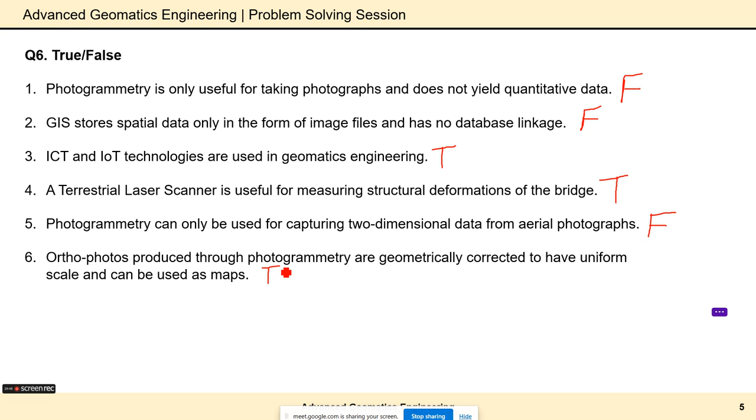Got it? Okay, so we'll move to the next question. Identify the true statement. Here a statement and the reason behind it are given, and you have to say which option is right.

The first statement is: remote sensing can help monitor deforestation and urban sprawl. Is it true or false? True. So what do we do in remote sensing? Basically, yes.

Okay, so first we'll break down this sentence. Remote sensing - what is remote sensing? You have different satellites in the sky. They are monitoring Earth, so they are also known as Earth observation satellites.

Now these satellites monitor the area of Earth like this. If any forest is here, let's say we have a tree representing forest. This satellite will move in this direction and measure this area, and after some days it will visit the same place again. Now, if there is deforestation, we will be able to see a decrease in the number of trees, or if there is urban sprawl, it means there is an increase in the number of buildings. So we will be able to monitor.

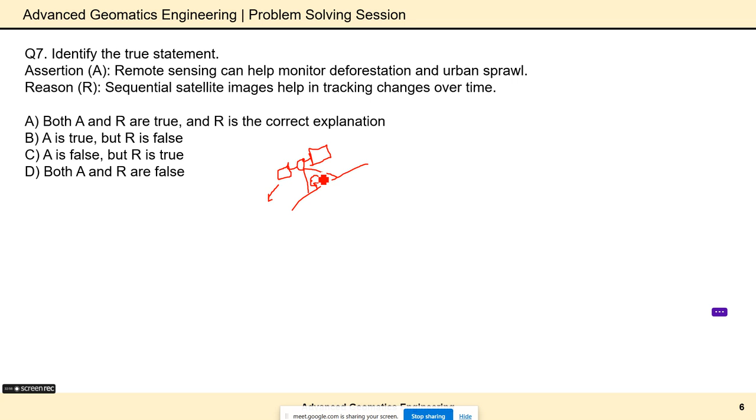Both true. Okay, and then R is also the correct explanation because with sequential satellite images, we get an image every 6 days or one day depending on which satellite we are using. If you go to the subsequent part of this course, you will learn more about which kinds of satellites are available and how frequently they give data. We will also do some practical examples so you get more idea of it. So the right answer is option A, the seventh one.

Now the next question: arrange the following types of photogrammetry in descending order based on technological advancement, most recent to first. So how we used to take photos in the past, how we collect photos in today's era, and what is the evolution throughout this period.

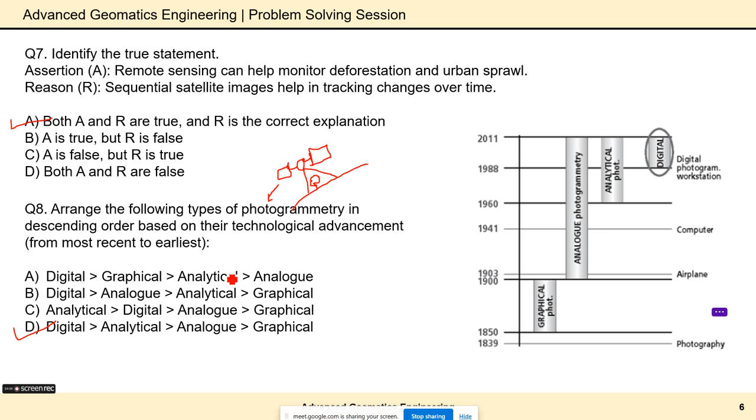If you have gone through the lectures, you might have seen this in the second week or second module, where it started with how in 1839 we took the first photo, and it all started with photogrammetry, then there was advancement in the camera. First we took graphical photos, then we used films to get photos, then it became more advanced with analytical photogrammetry, and subsequently in today's era we are getting digital photos after 1988.

So the next question is: which of the following companies is not a geospatial software provider in India? Yes, D. So can anyone tell me what they provide if not software?

Have you heard the name Sokkia? What do they do, this company? Basically, this company produces different kinds of survey instruments. So they provide the instrument or hardware part rather than software or service.

So the next one is: find the correct statement, where you need to know more about photogrammetry and remote sensing. Before that, can anyone tell me the basic difference? What do you mean by photogrammetry and what do you mean by remote sensing, and how are both different or are they the same? What is your take on that? Yes, true, that's true.

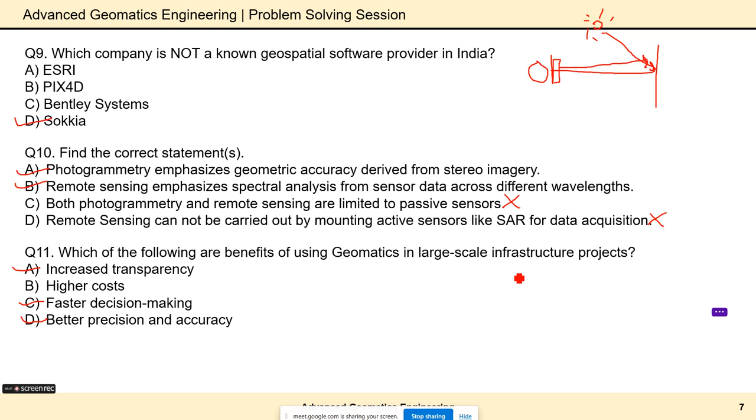Any doubt? Okay, so now the next question is: in comparing maps and aerial photographs, the clarity of details is - so in which will you get more clarity, in map or in photo? What might be the true option out of these four?

Anyone else? More on photo than map. Anything else? Any other option, guys?

So can you see the options here? It's like, if you think about it - just see the options. Do you see any similarity between option D and option A? Do you see anything there like option A and D? Don't you think both are the same?

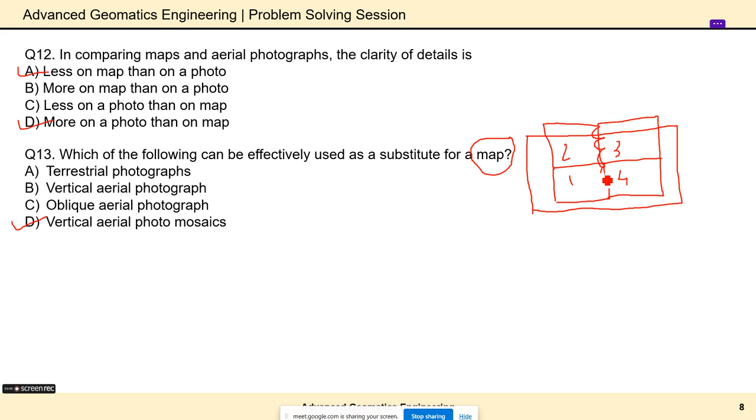These are different photos captured in the same area - photo number one, two, three, four - and then you will stitch all the photographs with each other. That is known as a photo mosaic, and it will give a larger view.

Did you get my point now? So the correct answer is vertical aerial photo, but with mosaic, as the map will show more area but lesser details. So there will be lesser detail in the map, but the area will be large.

The next one is scale. So what is the definition of scale?

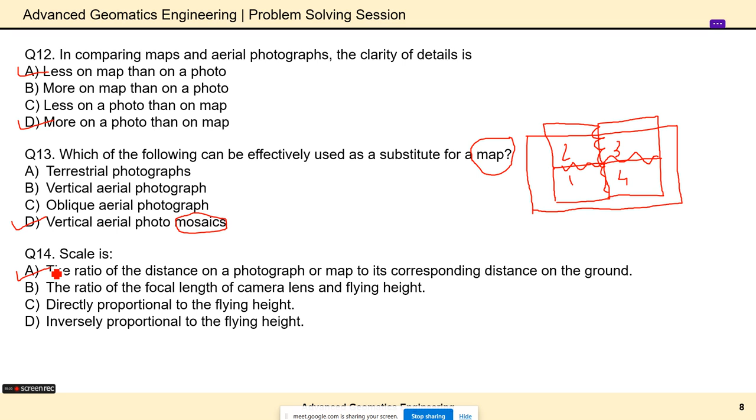A. Yes. Anyone else? So the scale is the ratio of distance on a photograph or a map to its corresponding distance on ground, that is known as scale.

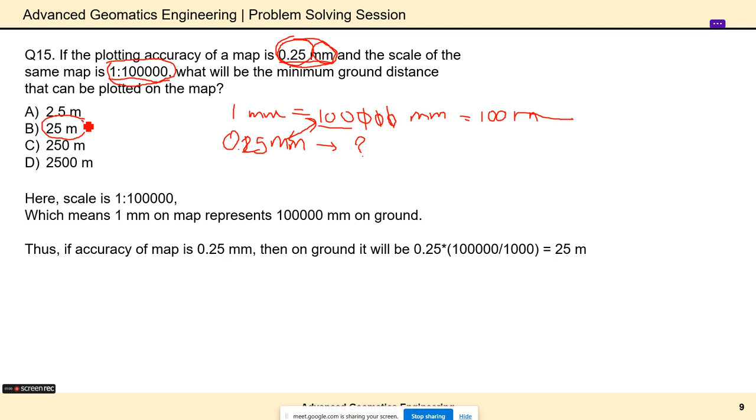So the next question is: a line measures 15 centimeters on an aerial photograph. So we have one photograph in which there is one line which is 15 centimeters. It measures 5 centimeters on a map.

So 15 centimeters on photograph, and it measures 5 centimeters on map. So on the map it is 5 centimeters, the same line will be 5 centimeters, at a scale of 1 to 24,000. So the scale for the map is 1 : 24,000.

Okay, now let's decode the question further. The photograph was taken using a camera lens. Now they are talking about photograph. What photograph? The photograph was taken using a camera lens of 20 centimeter focal length. So for this photograph, f, which is the focal length, is equal to 20 centimeters.

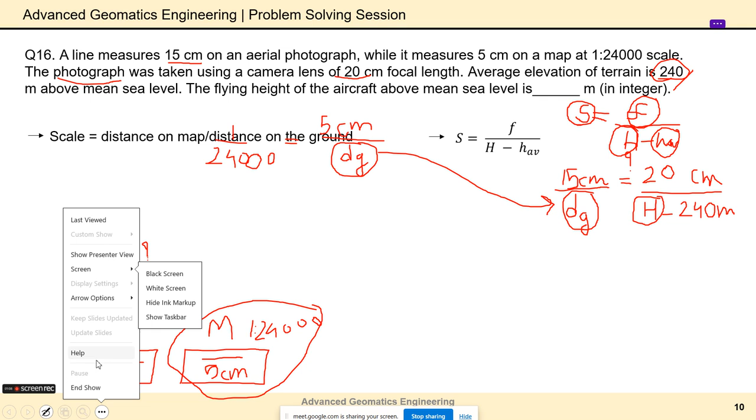So we will now see the solution. We will get the first value of the scale, and then we'll plug that in. So our actual answer will be 1840. If you made any mistake, it might be in the conversion of different units. So basically you will get the answer 1840 meter.

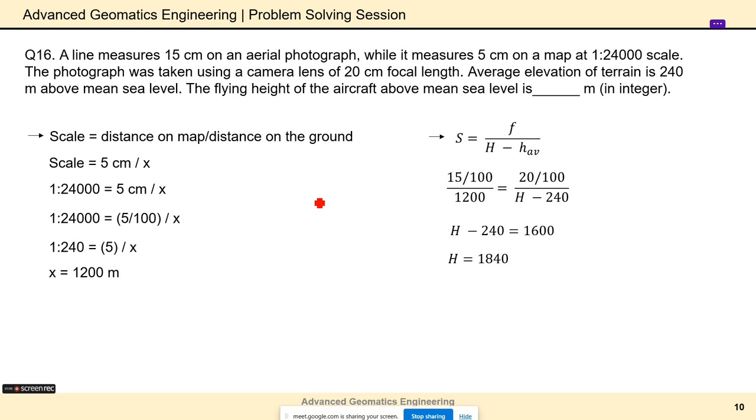Any doubt in this question? Basically in the concept of this question, any doubt? Okay, then we'll go to the next question.

So what are the Manhattan and Pythagoras distance with respect to point A and B in the figure given below, where the Euclidean distance between A and C is 4. So what you have to mean is each box represents 1. So this length is 1.

If you don't know the concept between Manhattan and Pythagoras distance, I will give you the brief. What does that mean? If given two different points A and B, then if you go from A to B, what will happen? If you go diagonally, then it will be considered as Pythagoras distance, as you do using Pythagoras theorem.

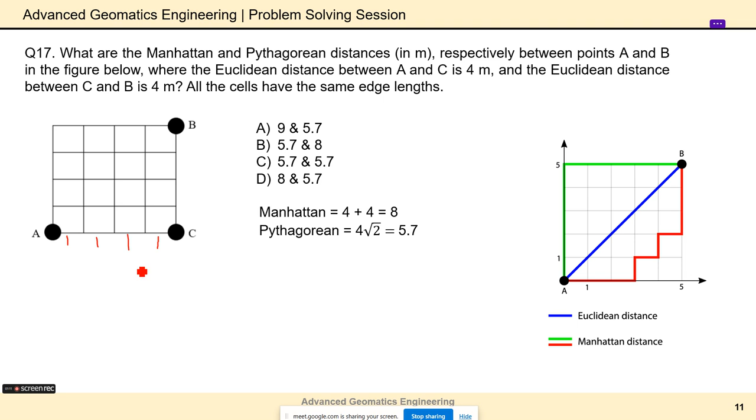Okay, so the correct option will be D. Manhattan distance means you have to go line by line, you can go here like this, to like this. Then it will be 4 plus 4, 8.

Or else what you can do is you can go 2, 3, 4, 5, 6, 7, 8. So you can go in any way, but you don't have to go diagonally. 1, 2, 3, 4, 5, 6, 7, and 8. So it will end with 8 only.

Whereas the Pythagoras distance will be the minimum distance between A and B, which will be like this. So if this is 4, this is 4, then that will become 4 root 2.

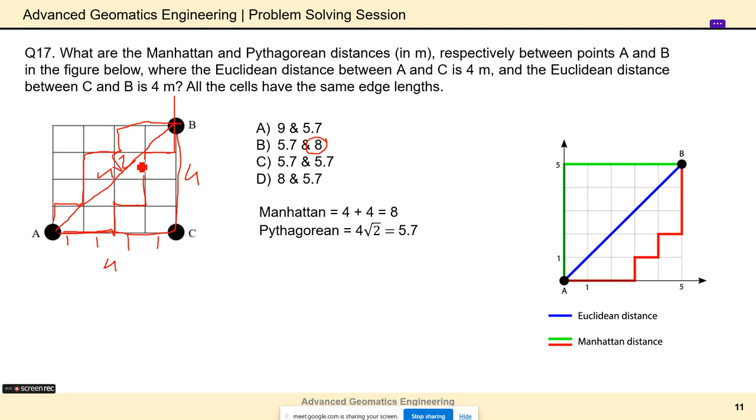So the next question is, which of the following map scale is more suitable for urban planning? Here you have to stress more upon the definition of scale: distance on map or image to distance on ground.

So first of, yes, anyone else? So the one answer which we got is 1 to the 10,000. Anything else?

So what I want to say here is, if you have urban planning, then you need very high resolution. It means the distance on map should represent very high resolution distance. So in which of the following, if it is the same distance on map, it will represent very high information.

The answer is A, 1 to the 10,000, because it's just a higher resolution scale. Why? Because if we consider both in mm, then 1 mm is representing 10,000 mm, which means 10 meter. So 10 meter on ground is represented by 1 mm. Here 25 meter on ground is represented by 1 mm, 50 meter on ground is represented by 1, and here 100 meter on ground is represented by 1. So maximum detail we will get in the first case.

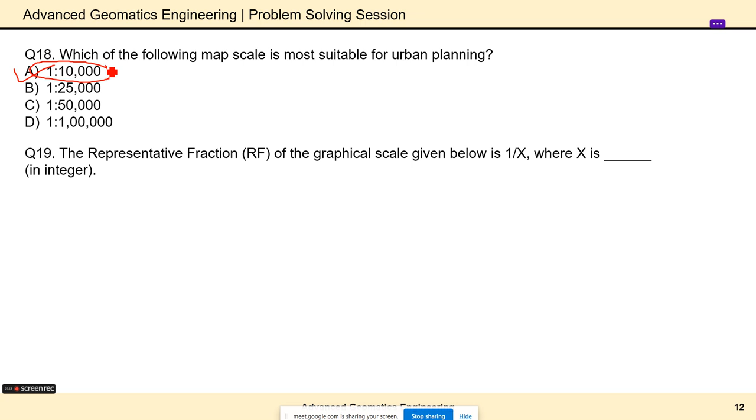The next question is the representative fraction RF of the graphical scale given below, which is 1 by x. So what will be the value of x?

100. Okay. Anyone else? 0. Anything else? So we got two answers till now, 100 and 0. One is 100 and one is 0. So you have to see the entire scale. Any other answer? Anyone?

So let's decode this question. 10,000. Okay, the third answer is 10,000.

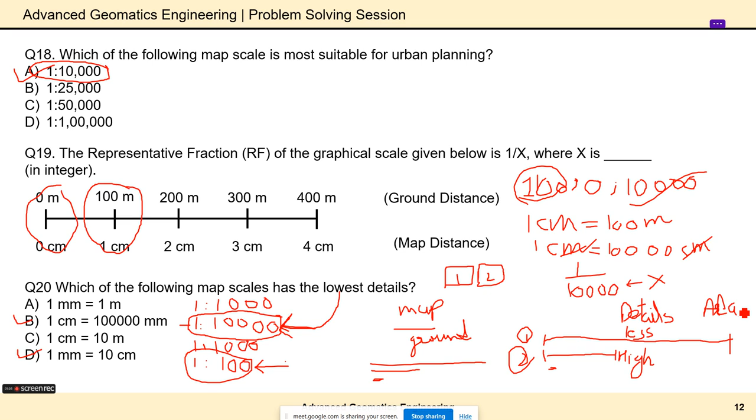Okay, so the next question is, what is the typical positional accuracy range of LiDAR? This is just a memorization question. Does anyone remember what is the typical accuracy of LiDAR? You can refer to your notes also.

Okay, and in the horizontal direction, how much? Any option is right. In horizontal also. I don't agree with you, because if the accuracy is good in both vertical and horizontal, we should be able to precisely map.

30 to 60 horizontally. Why? You can take anything, whether it's LiDAR or GPS, they are very poor in the vertical dimension. They are not able to capture the vertical dimension clearly. Height information you will not get very clear, but the horizontal information you will get very clear. If you use Google Maps, you will exactly know how you are going from one location to another if you move north or left, it will pinpoint your location properly. But if you are going up, let's say one floor to another, it will show the same location, because GPS is very poor at getting vertical data. That's why in any surveying operation, vertical accuracy is much less compared to horizontal accuracy. But in LiDAR we still get very high accuracy in the vertical dimension as well, though it's still less compared to horizontal accuracy.

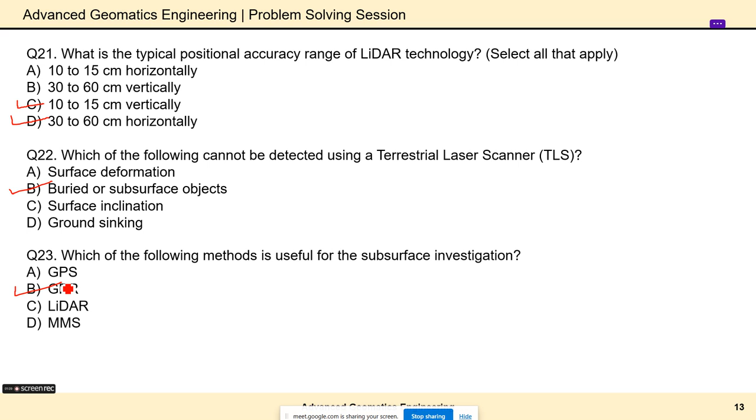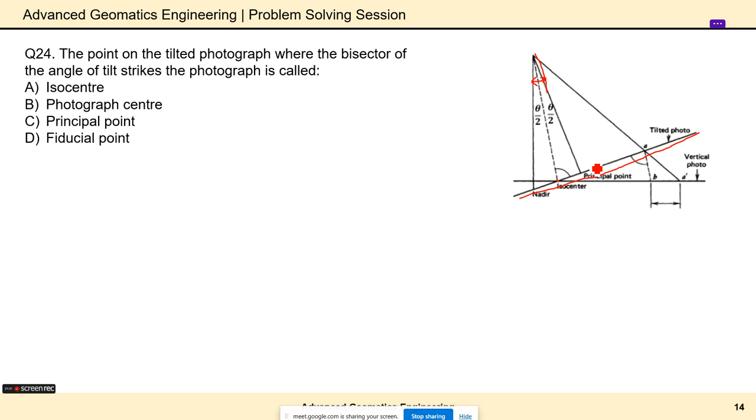Then the next one is, increasing the angle of tilt in aerial photography may lead to. Now if this angle is there, we will increase this angle, because this nadir line is fixed at 90 degrees. But now I am changing this line to increase this theta, moving this line like this. So what will happen to the photo?

Okay, so my image will become like this.

So why are the other options wrong? I am more interested in knowing that. If you're saying option A is right, it means you're also right, I mean that it will obviously capture more area. But I want to know why the other options are wrong.

Exactly. Yes, exactly. True, true. So your logic is true for all the options.

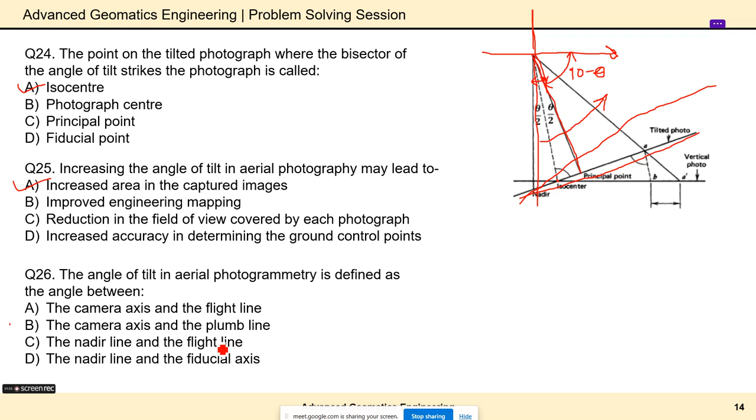But plumb line and nadir line both are 90-degree lines. So here they have used two different words: one is plumb and one is nadir. Both are similar only in terms of this definition. So your correct option will be this one, camera axis and plumb line, so basically this nadir line. So this angle will become this.

This is your camera axis like this, and this is your plumb line or nadir line. So the angle between these two is known as the angle of tilt. And this is your flight line. So the angle which you will get here, that will be 90 minus theta, so 90 minus tilt angle, not the tilt angle. Okay.

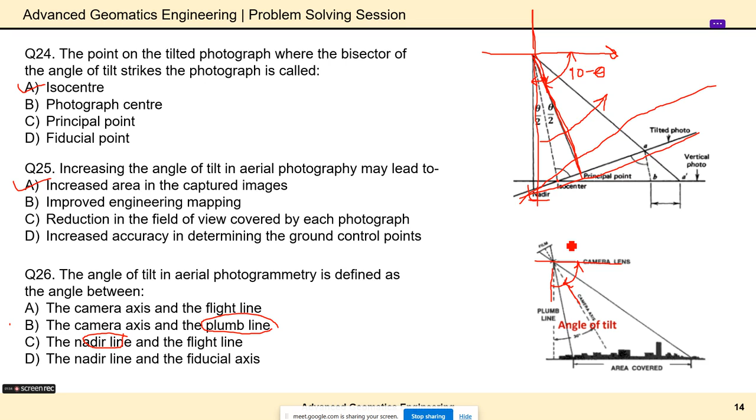Next: so the scale of vertical aerial photograph of undulating terrain is...

So here I have given the formula also to help you think which one should be right. S is scale, F is your focal length, capital H is the height of flight, and H average is the average elevation of your terrain.

So if you are not able to find out which one is right, can you tell me which one is wrong for sure?

See, if you see here, S is your scale, F is the focal length, so both are directly... okay, anyone else? Are you agree with this answer?

Okay, so let's decode it, we'll go from D to A. So, uniform throughout the photograph: as the photograph is of undulating terrain, it means there are much more fluctuations in height. The scale will not be uniform, it will be varying because this H average is not constant. So that's why we have to take H average, and that's why it's not uniform.

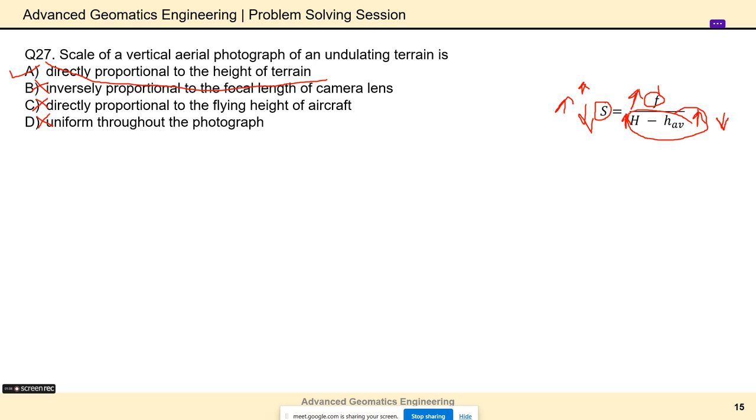Okay, so now we'll move to the next question: the isocenter of a tilted photograph. So this we have already discussed. Can anyone just go ahead and quickly give the answer?

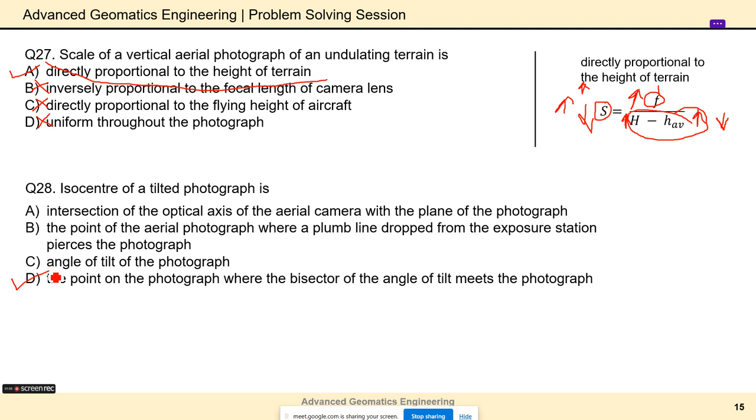Option D is correct, as we discussed in the previous question. Now for question 29: for constant flying height, where capital H is fixed, the average scale of an aerial photograph depends on which of the following parameters? It's similar to the previous question.

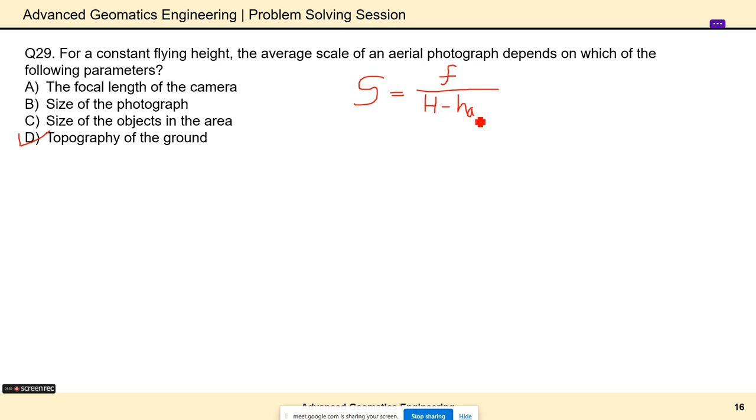Topography of ground - anything else? What was the formula? Scale equals focal length divided by H minus H average. Do you see focal length in the options? Do you see any other variable? Yes, so option A and D both are correct.

Now the next one is: select the odd one out. Which of the following is different from the others? The options are contact prints, film positive or diapositives, stereo photos, and digital. Contact prints - okay, anything else? Contact prints.

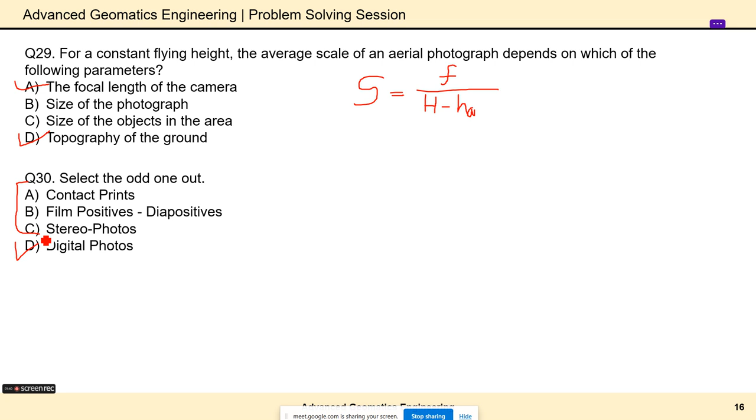The correct option here is digital photos, because digital is on computer, whereas these three are traditional techniques in which you get the photo on paper or some kind of surface. This is the evolution of photograph: contact prints, which generally used to be 23 by 23 centimeters, then film positive and diapositives, then stereo photos, and then digital photos.

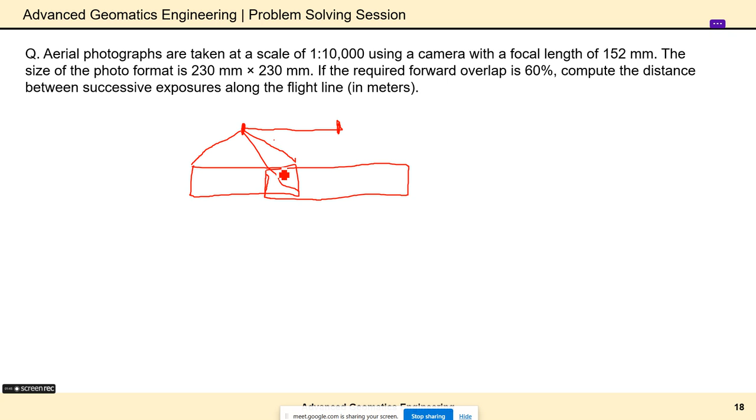Let's say this is our aircraft, and it captured one photo like this. Now the aircraft moves forward to here, and captures another photo of the location. So what we have to find is the distance between successive exposures - here is one photo, and here is the other photo I have taken, and I need to find the distance between these two stations.

The details given to us: the overlap in both images is 60%. Also given is that the aerial photographs are taken at a scale of 1 to 10,000. So the photograph received at the aircraft will have a scale of 1 to 10,000, and the focal length f is given.

When f and scale are given, the formula to recall is: scale equals focal length f divided by H, which is actually H minus H average. But here we do not have any H or H average, so this formula will not work directly. What is given instead is the photo format, 230 by 230.

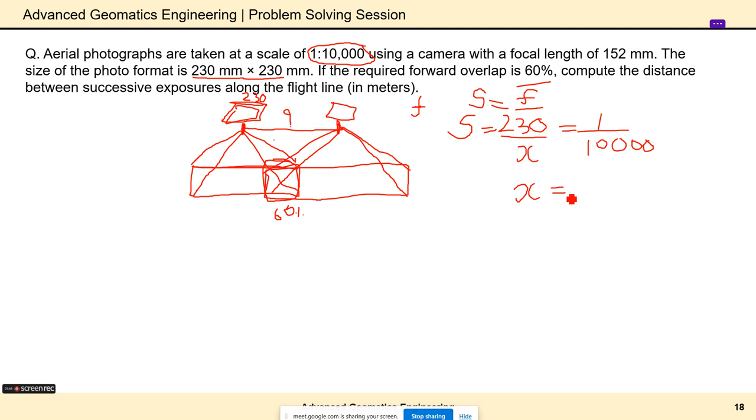So how much will we get here? If we convert this 230, let's consider everything in mm only. And if we want to convert this into meters, we'll divide it by 1000.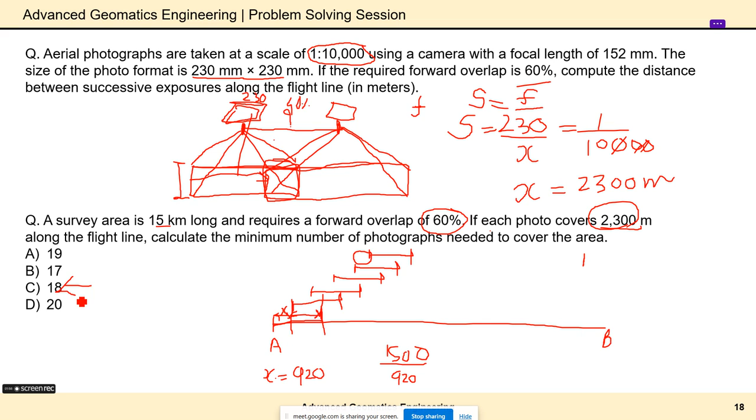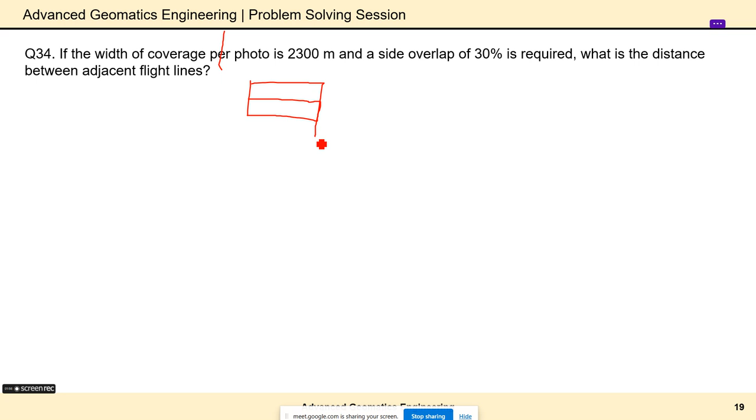So the next question will be like if the width of coverage per photo is 2300 and the side overlap is 30%, now we are talking about side overlap, then what is the distance between adjacent lines? So here we are doing two photographs which are adjacent to each other, having side overlap which is 30%. So what is the distance between this adjacent two flights?

Similar to the earlier question we did, if 30% is common, we take the rest of the distance which is 0.7. So it will be 0.7 into 2300. In the first question, when we calculated the distance between two air bases, it's similar to that distance between the two adjacent lines. So it will be 1 minus overlap region into the width or length. So 0.7 into 2300 will become around 1610 meters.

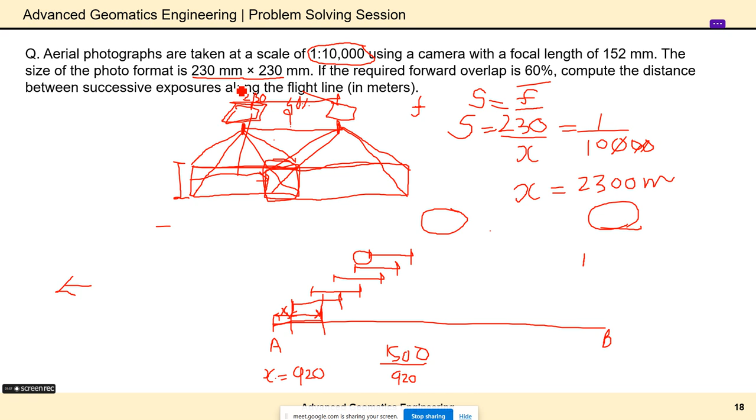You got my point? So we are doing the same as we discussed in the first question. Like here, we did 1 minus 0.4 into 2300, converted into a similar thing. So 1 minus 0.3, which will be 0.7 into the photo, which becomes 1610.

The next question is an area of 10 kilometer by 8 kilometer is to be covered using aerial photographs of 60% forward and 30% side overlap. Each photo will cover 2.3 by 2.3 kilometers. So how many flights do we have to cover?